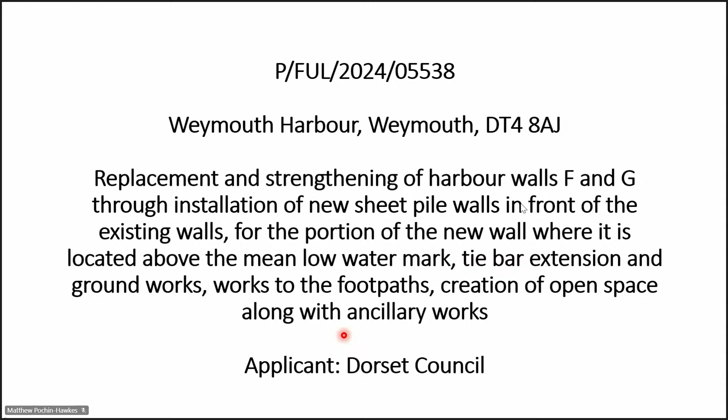It's for the replacement and strengthening of harbour walls F and G through a new sheet piling wall installed in front of those existing walls, all for the development above the mean low watermark, and with tie bar extensions, works of footpaths, open space, and ancillary works.

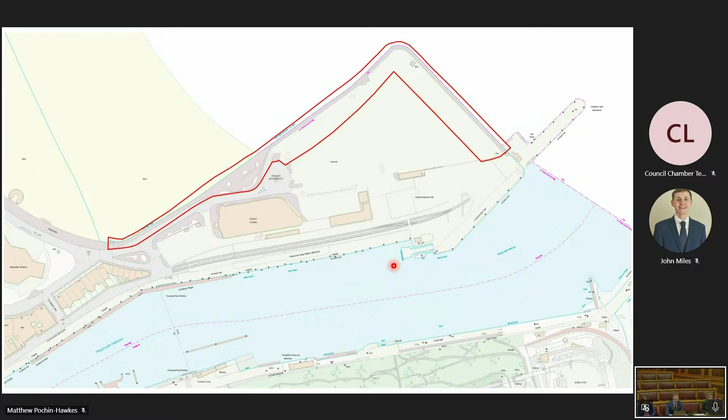So this is the site. It includes sections of the existing wall here, wall F and wall G, and the footpaths on the south side of that. It includes an open space here and the car park area, which is around the edge of the walls. This is an aerial view of the site.

The majority of the site is hard standing, save for some planters around this side of the existing open space, which is north of the Pavilion Theatre building.

The planning application relates to works above the mean low watermark, so that's essentially a small part of this section here, and then the existing land. Land below the mean low watermark falls within the jurisdiction of the Marine Management Organisation, for which there's a parallel application for marine licensing works that's currently live and undetermined.

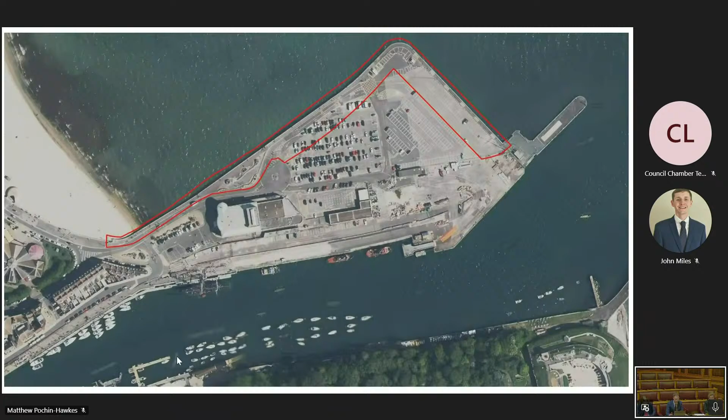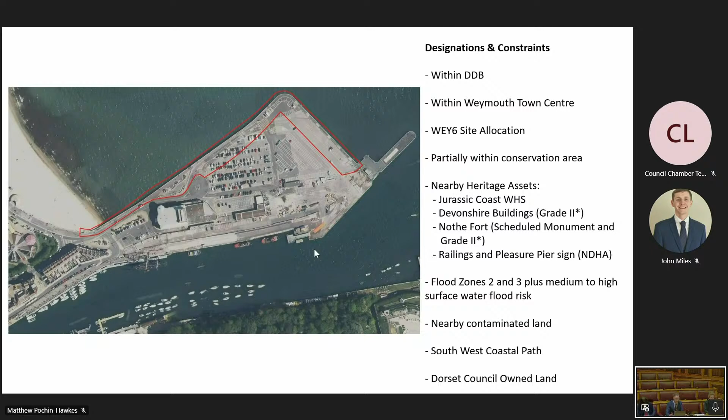So these are the designations and constraints. The site is within the defined development boundary of Weymouth. It's within the Weymouth Town Centre area, and it forms part of policy WEY6, which is a site allocation. That policy, Ferry Peninsula, is more to do with the long-term regeneration of this area. It includes the whole of the peninsula here, and it promotes the comprehensive redevelopment of the peninsula for leisure and tourist-related uses, supported by complementary town centre uses and housing, together with the continued operation of the ferry service.

Bear in mind, the local plan was adopted in 2015, and this ferry service has since ceased.

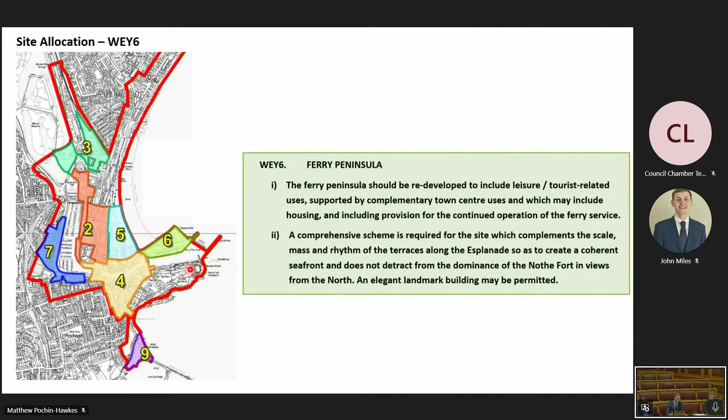Other constraints: a very small part of the site falls within the Weymouth Town Centre conservation area, just clipping the southwest corner of the site there.

Nearby heritage assets include the Jurassic Coast World Heritage Site, which is on the other side of the harbour entrance. The Devonshire buildings here, the closest asset to the site, are grade 2-star listed. There's Nothe Fort as well on the other side of the harbour, which is a scheduled ancient monument and a grade 2-star listed building. Within the site itself, there are the railings which run along this part of the

existing wall and along the west of the esplanade. They're a non-designated heritage asset, and there's also a pleasure pier sign, which is also considered a non-designated heritage asset.

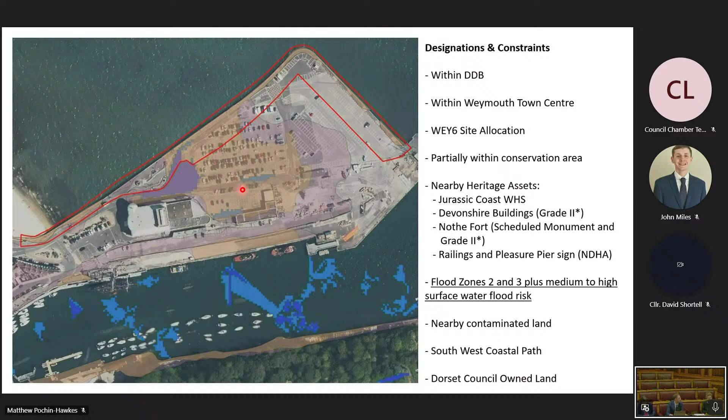So the site is affected by flood risk, as you'd expect. What's shown here is the flood zones 2 and 3, which affect part of the site and the immediate surrounding area of the peninsula, and they have medium and high levels of surface water flooding. There are also isolated parts of surface water flooding as well.

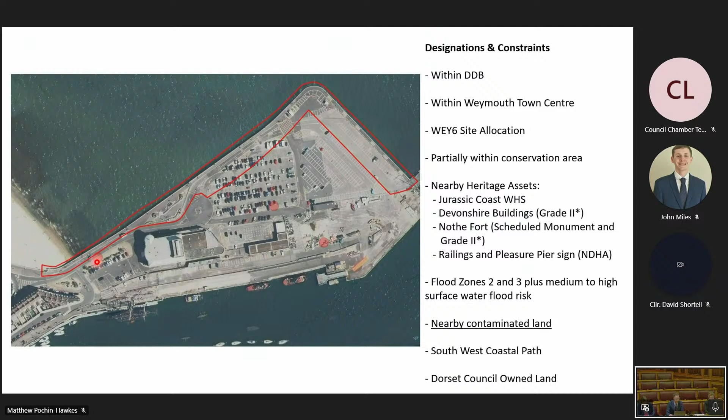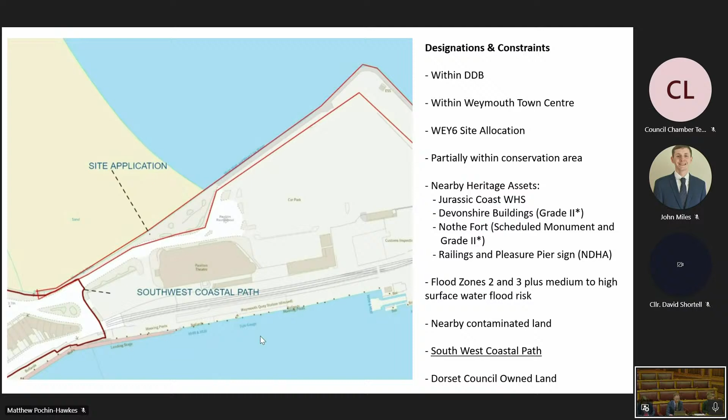There is a nearby spot of contaminated land, and there's also a few others across the wider peninsula there. The southwest coastal path clips the corner of the site as well. In terms of ownership, the site is entirely owned by Dorset Council.

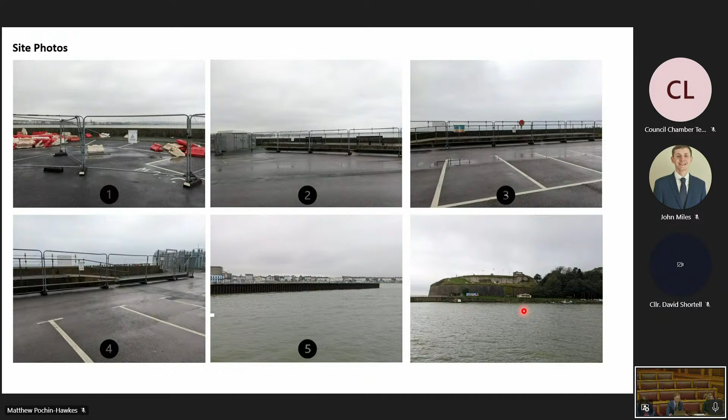These final photos here are from the pleasure pier looking back towards Wall F, and then looking across the harbour. You can appreciate the distance there with Nothe Fort and what is part of the World Heritage Site as well.

Just to provide some context, this is a historic aerial view showing the construction of Wall F and Wall G. It was constructed through piling and backfilling, with this section of land being reclaimed from the sea around 1977.

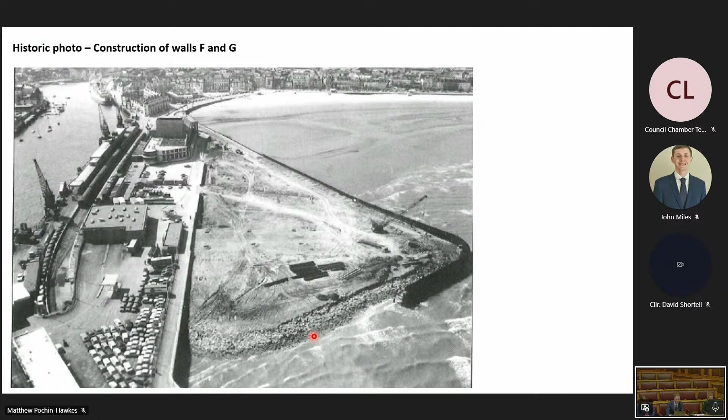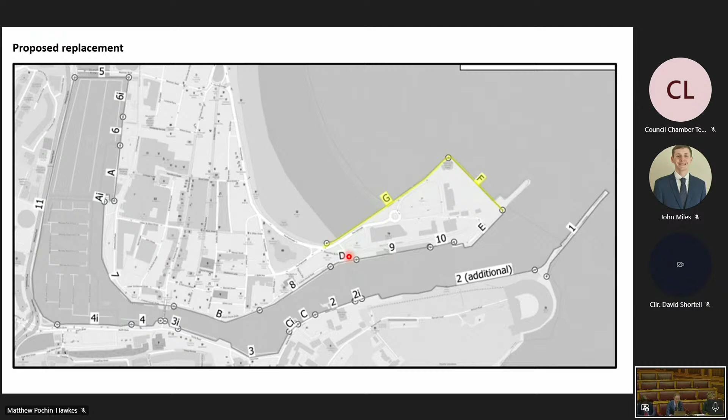The wall forms part of a series of flood defences around Weymouth, some of which have been recently upgraded, and others where there are future plans at different stages of development. So that's Wall F, that's Wall G, and the report also talks about some recent upgrades to Wall D down here, along Custom House Quay, where the wall has been fairly recently upgraded.

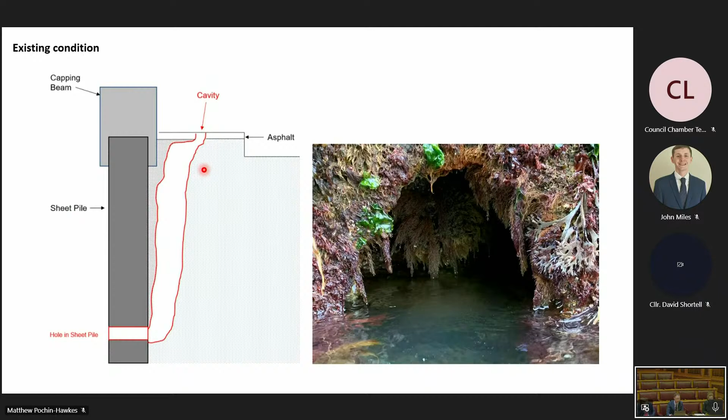Just to show the condition of the wall, they are in a very poor state here. This is one of the cavities that has opened up within the wall along that northern section. What you see here is a diagram from the applicant's engineer, WSP, which shows how that has led to sinkholes developing. The future lifespan of these walls is very limited - they are in urgent need of replacement.

So onto the proposed plans, the proposed development. There are a lot of technical drawings in this application, so I'm just going to focus on the landscaping plans and the sections. Here we've got the proposed landscaping plan.

The proposal is for the construction of new sheet piled walls in front of the existing walls. So all the work would be done on the seaward side of the development, and the existing walls would be demolished down to ground level, with part of the walls being buried below the ground.

It's split into two sections here. The first section is section G, which runs up to where the pleasure pier sign is. That section would be cantilevered without any kind of lateral supports underground. The remaining section of Wall G and Wall F would be supported by underground tie bars, which would link into the ground - that's an engineering operation which needs planning permission.

The new land created behind the new walls would be backfilled with new reclaimed land, and a footpath cycleway created along that front. So the footpath cycleway would get slightly wider.

There are two open spaces within the site. You've got the existing one here, which would be remodelled slightly, and I'll come on to that. And you've got a new open space here, proposed at the northern tip of the site, designed as a raised platform to allow better views over the raised height of the wall, and designed as a kind of picnic area with benches to compensate for the loss of seating areas along this section of the wall. The car park would also be rejigged slightly, with a slight loss of car parking spaces overall, but an increase in the number of accessible bays.

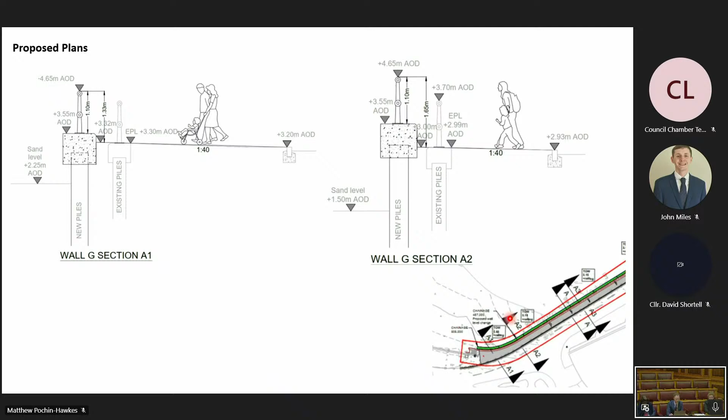As you progress round, so that section A1 on the left there, as you progress round, you can see it's similar to existing.

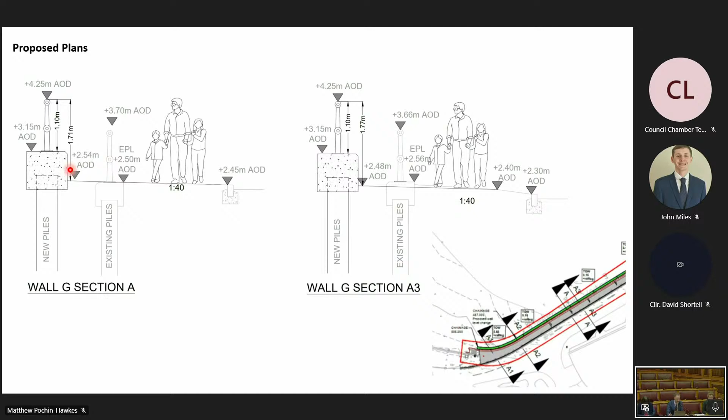Moving further along, the capping beam steps up slightly, but it's quite a low level. Views are going to be similar to what's there at the moment, and there'd be railings atop of that wall. Entering the existing public open space by the Pavilion Theatre, again, the design is similar, views would be similar across it.

What's changed within that space in terms of the landscaping is that rather than having a series of different planters within the site, there'd be one continuous planter along the eastern southern boundary. That's beneficial from a public amenity perspective, because it gives a barrier to the car park and creates more open amenity there. It's also important for compensating for the loss of those planters in biodiversity net gain terms.

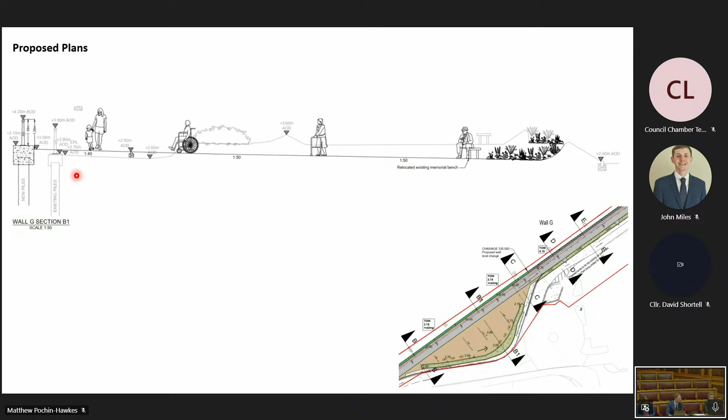This is a long section through that existing open space, and as you can see what I've talked about there, you've got relocated benches proposed, planting to the rear, and again, views would remain similar to what they are at the moment, and the anchor that's on that part of the site would be retained.

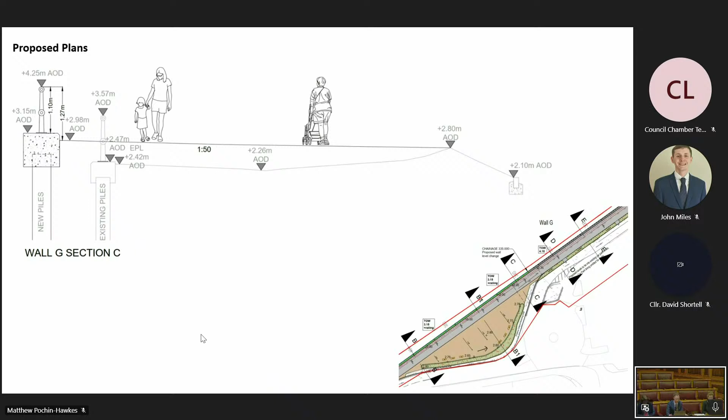Walking slightly further along, again, you can see the height of the walls would be similar to existing, and views would be similar. This is where the height of the wall changes quite significantly from what's there at the moment, and this is needed for flood risk reasons.

But after the existing open space, the wall changes from a cantilevered wall to one that's tied back in with these tie bars.

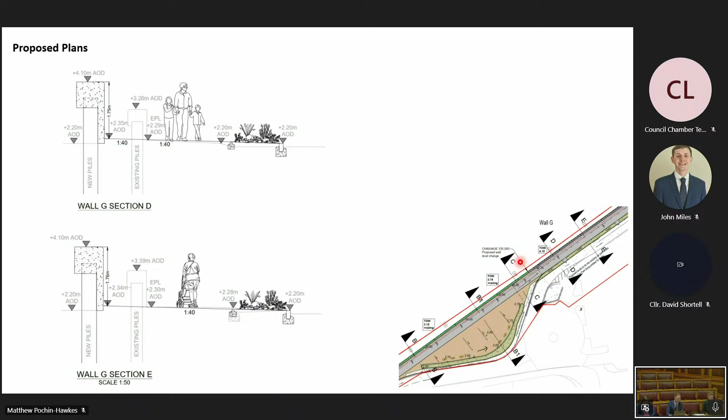In sections D and E, you can see the quite significant step up in the height of the wall. This goes up from around 1 metre at the moment to 1.75 metres. So it's going to restrict views along there.

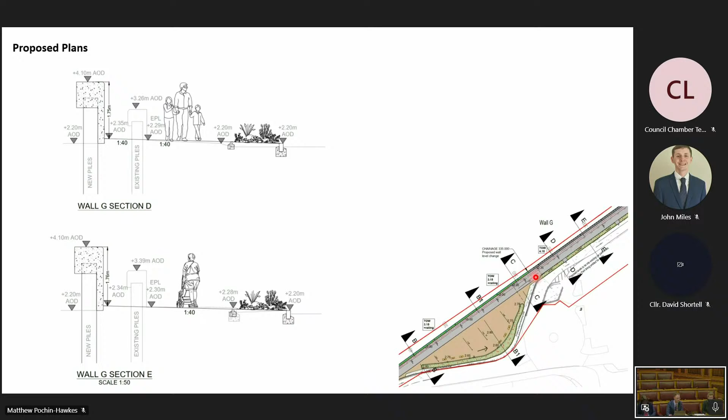But I suppose importantly, that's the section which people would just walk along. It's not a place that you'd dwell.

So that section of the wall is higher, and as you get towards the new open space, again, it is still quite high here. That is 1.3 metres there, so around 30 centimetres higher than what it is at the moment.

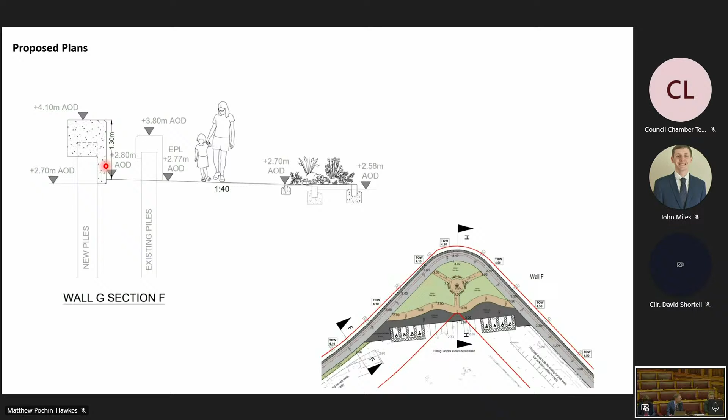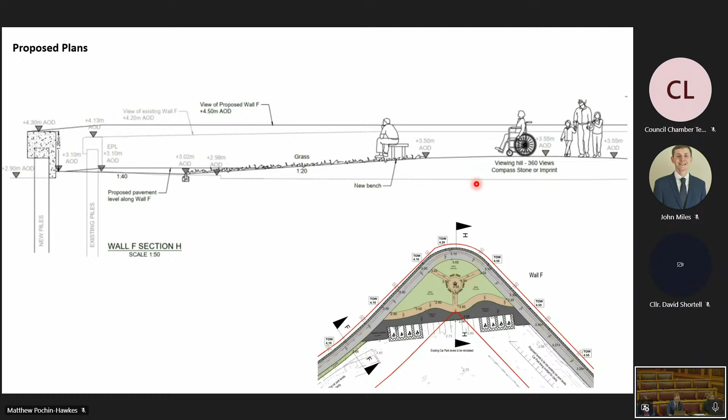And then as you get into that open space, you can see how it's been designed to have a raised platform here, so that members of the public can get those panoramic views across it, and there is public amenity in terms of seating to compensate for what was proposed to be removed in other parts of the site. And the wall here is around 1.2 metres.

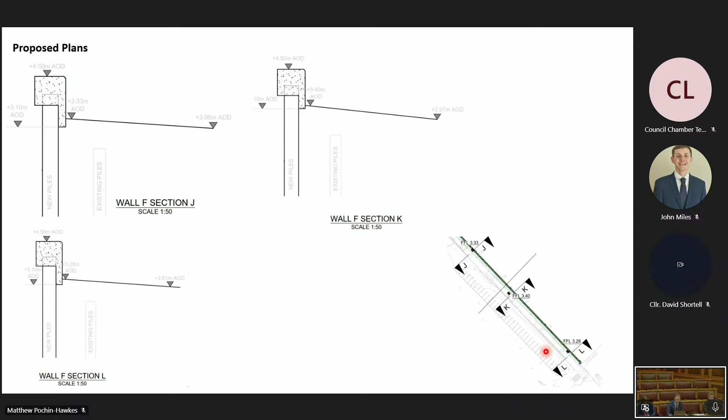The rest of wall F, as you walk towards the pleasure pier, the height of the wall is 1.2 metres, slightly higher than existing.

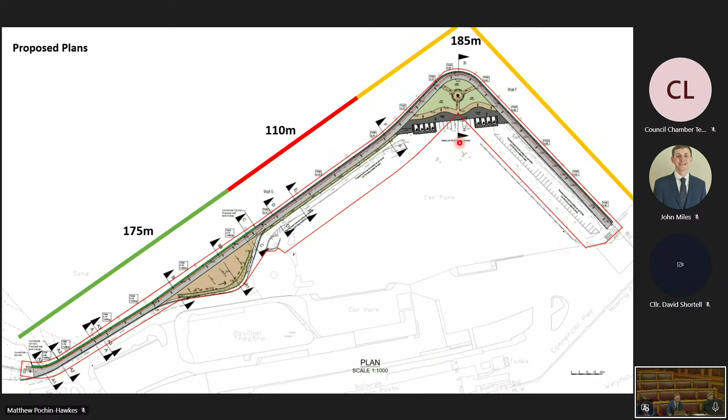And overall, it's about 75% of the length of the wall that would be visible over the top or have only limited restriction. So coming on to the key planning considerations: the principle of the development. The existing walls are in a poor state of repair, and they're in need of urgent replacement, as you've seen from the photos and the applicant's reports. So the replacement is wholly acceptable in principle, and the improved open space and pedestrian cycle routes are also acceptable in principle.

In terms of design, landscape, and local character, the design has been amended over the course of determination in response to officers' comments and concerns. Those changes have improved the design. At the end of the day, it is what it is — it's a seawall, it's functional, it's fairly utilitarian in that design. But the open spaces are an improvement, and overall the design is considered to be compatible, and the landscaping is acceptable, subject to conditions.

And just to point out on trees, you see in the report that the landscape officer does say that there's potential here for tree planting within the site. The site hasn't got any trees at the moment, apart from the planters, it's all hard surfacing. In the absence of a policy for net gain of trees within the site, I think the officer's view is that it's acceptable without new tree planting in the site.

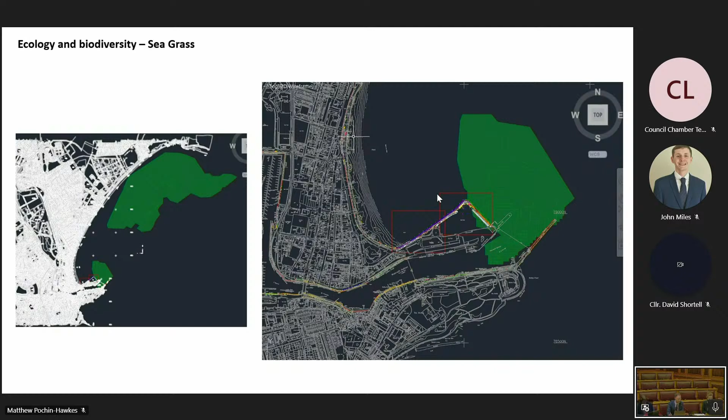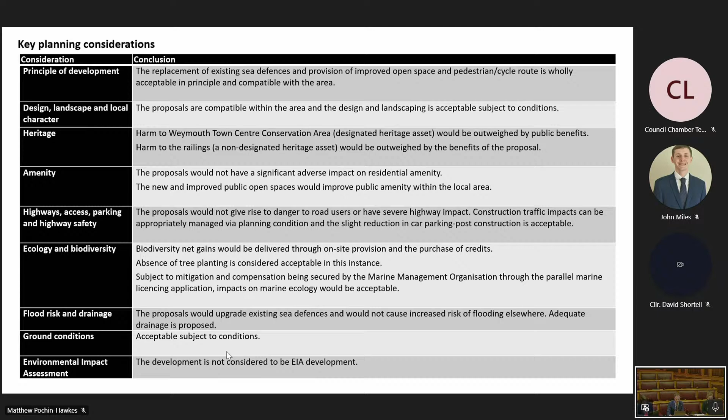So the recommendation is to grant planning permission, and that's, as I've said, subject to confirmation from the MMO that the parallel marine licensing application secures appropriate mitigation and compensation, and we should receive written confirmation from the MMO if and when that is the case.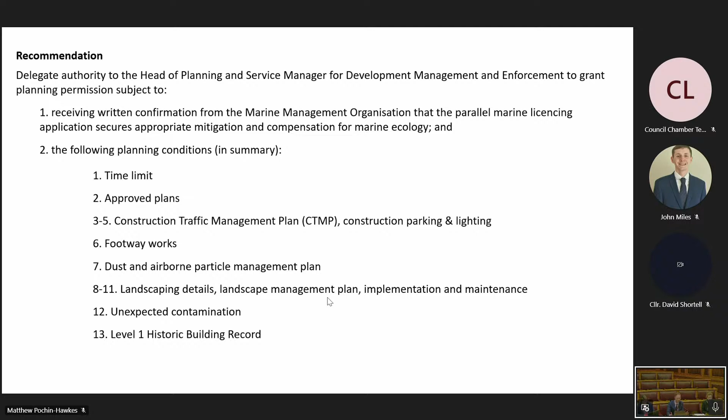The planning conditions proposed relate to the time limit and approved plans. There's construction-related conditions on the construction traffic management plan requested by Highways, construction parking and lighting, and footway works to be designed and aligned with Highways requirements. There's a dust and airborne particles management plan to manage construction effects on the beach, so it's not kicking up dust and particulate matter that could be an amenity concern. There are landscape conditions on details, landscape management plan implementation and maintenance, and retention of the pleasure pier sign. There's also an unexpected contamination condition, and a requirement for a level 1 historic building record - a basic photographic record of the pleasure pier sign and railings before they're removed, to ensure there's a record of that.

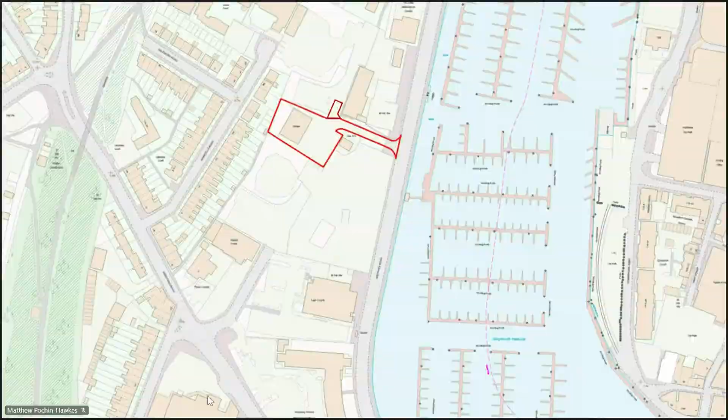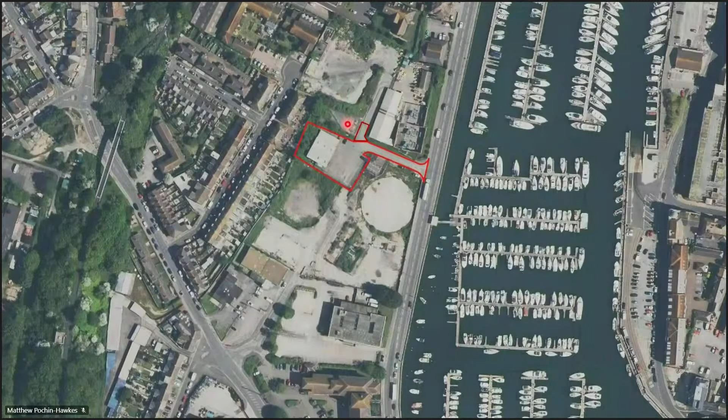This is an aerial view showing the surrounding area. To the east is Westwey Road and Weymouth Harbour. To the south lies the former gasworks site, of which the gas holders, for which the site formed a part. To the west is Granville Road, where you've got 2-storey terraced housing. To the north is a vacant parcel of land which had planning permission for redevelopment of about 23 homes, but that expired towards the end of last year. To the northeast is a site owned by SGN.

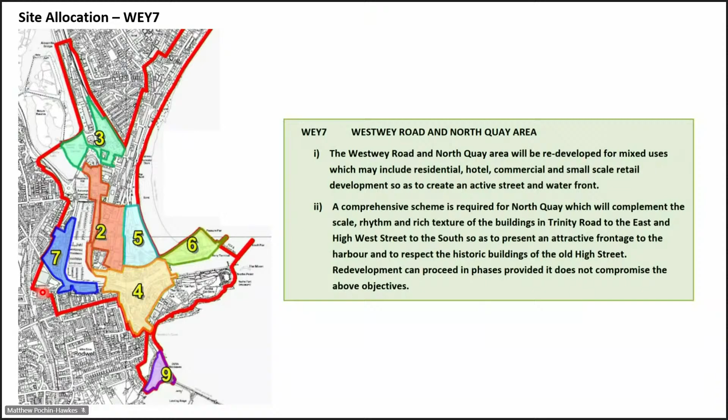So the designations and constraints: it's within the defined development boundary, within the town centre of Weymouth. It is allocated under Policy WEY7 of the local plan. Policy WEY7 is here in blue. It includes much of the land on the west side of Westwey Road and North Quay, and it promotes mixed-use development of that area for a range of uses, including residential, hotel, commercial, small-scale retail, and an active street and waterfront as well.

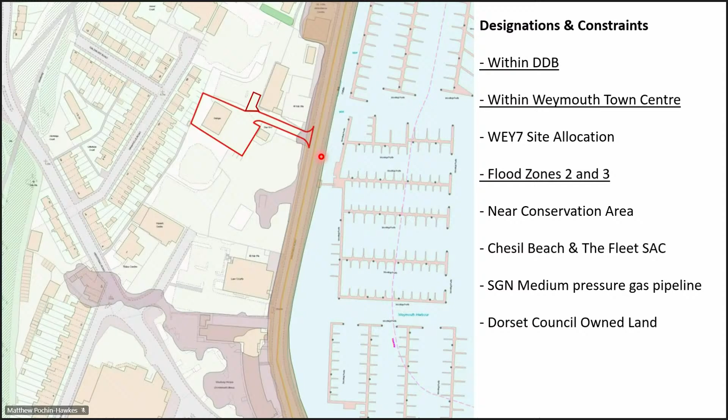Other constraints: the site falls within flood zone 1 for the majority, but the access falls within flood zones 2 and 3, and that's affected by tidal flooding. You can see flood zone 2 here in purple, and the yellow colour is flood zone 3, which includes the end of that access where it joins Westwey Road.

The site is near to the Weymouth Town Centre Conservation Area, which extends to include Weymouth Harbour, and the site is within 5 kilometres of Chesil Beach & The Fleet SAC. This just shows the medium pressure gas pipelines under the site, as you'd expect with the nearby gas holders site, and there's a current gas substation here as well.

And in terms of land ownership, the access is all within Dorset Council's ownership, as is land to the north and land to the south.

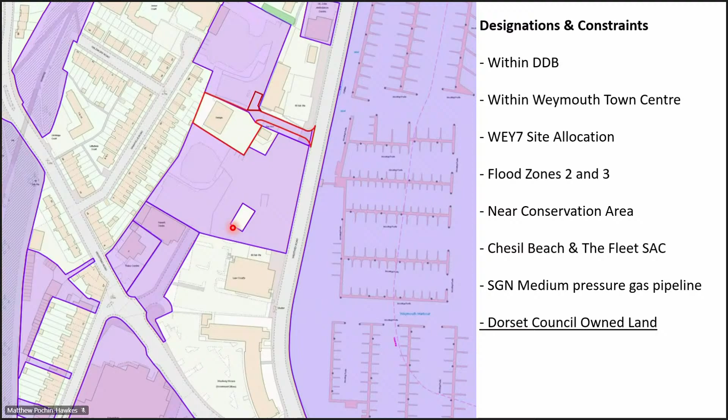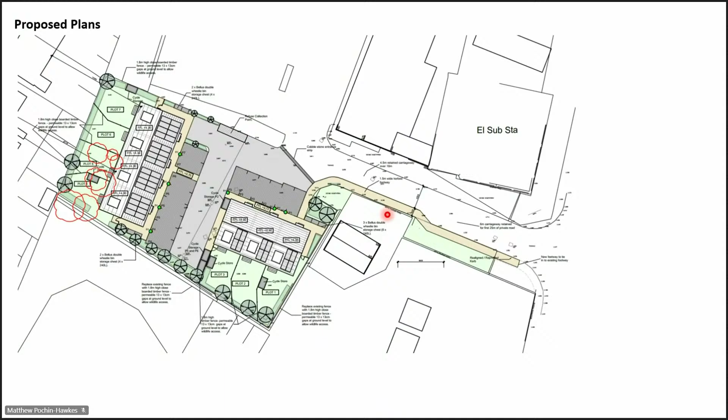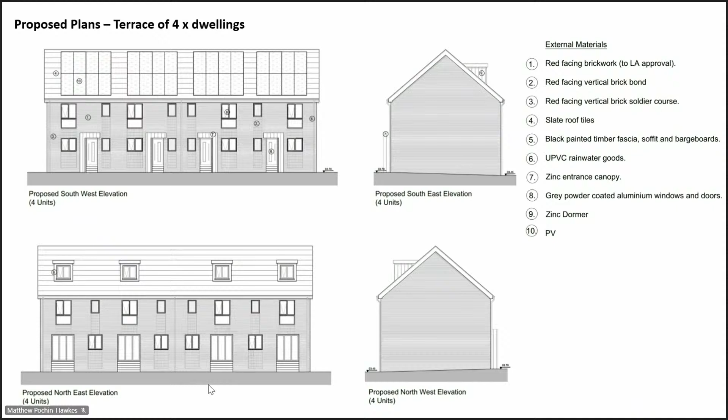The four unit terrace of three beds is the same design, so there's a consistency there across the development, and the floor plans are consistent as well.

On highways, just to talk to a couple of things before I go through the main planning considerations, in an effort to try and overcome the concerns raised by highways, there's been an iterative process of amendments that have come through and addressed in the report.

But one of the concerns from highways is that two vehicles can't pass each other, two large vehicles can't pass each other in this narrowed width of 4.5 metres.

To try and address that, what the applicants proposed is to introduce some white lining within the road, essentially a give-way marker here and some signage, so that anyone entering the site and approaching this way would need to give way to oncoming traffic. I think there's space here for about 16 metres to the entrance, which would allow for about 3 cars to queue if necessary.

In terms of off-site improvements, highways have picked up on a concern that there isn't a safe way to cross this road apart from walking down to Asda and going across that junction. And there's a southbound bus stop on Westwey Road, which residents may feel the need to dart across the road at a kind of unsafe point.

So the applicant has proposed that they would introduce a new safe pedestrian and cycle crossing. On the right here, that's just the illustrative design for it, and that would need to be secured by a Grampian condition.

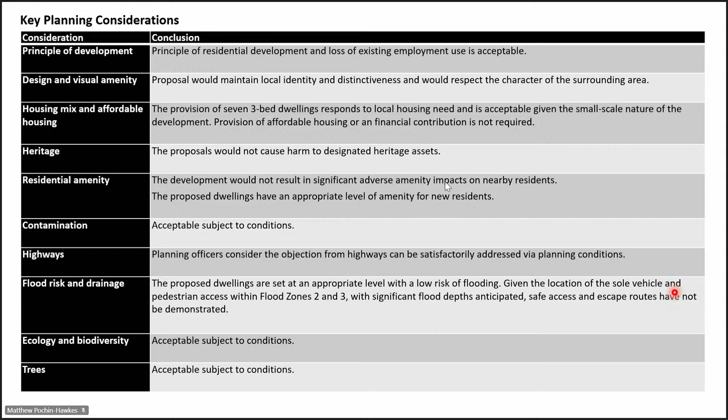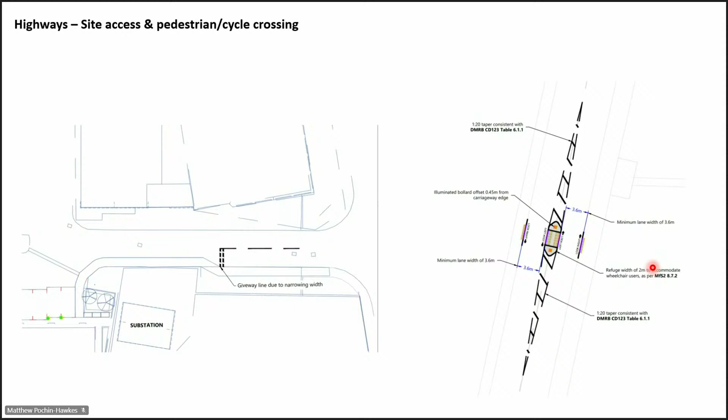The northwestern site is allocated for redevelopment. The previous proposals had vehicle connections through to surrounding roads, so it may well be that future connections go in through there. The introduction of the proposed crossing here would address the concerns on pedestrian safety on Westwey Road.

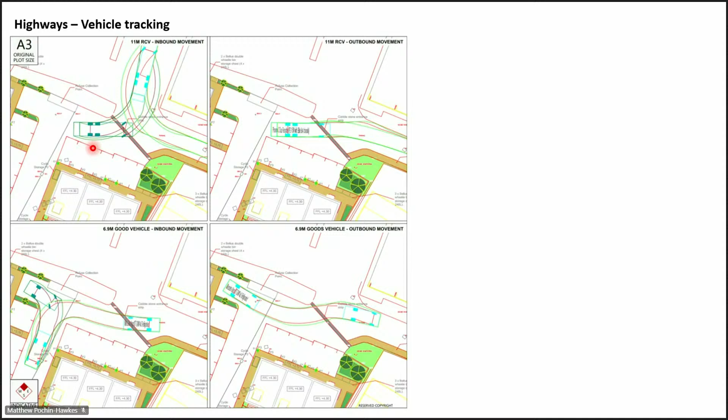In terms of refuse service vehicles, the proposed bin store is located near the entrance to the site, within 10 metres of the access and within the recommended drag distances for refuse collection. A refuse collection vehicle could service the site from here and then turn further along the access road, or it could reverse into the site, which is not ideal but not considered unacceptable in planning terms. Overall, the planning officer's judgment is that highway concerns have been satisfactorily addressed.

Flood risk and drainage is the key issue on this application. The homes are in flood zone 1, at a safe level above the predicted design flood level, but the access falls within flood zones 2 and 3. In planning terms, housing must be safe for its lifetime, being 100 years, and a residual flood risk must be considered. Because this site is affected by tidal flooding, the design flood risk event is a 1 in 200 year event, and that's what must be planned for.

The applicant has submitted a flood risk assessment, and they've also submitted flood warning and evacuation plans, which I'll come on to. The FRA doesn't model the depths along Westwey Road. I think we're all in agreement that the depths would be quite significant, and it doesn't make reference to the council's strategic flood risk assessment for Weymouth, which was introduced in February last year.

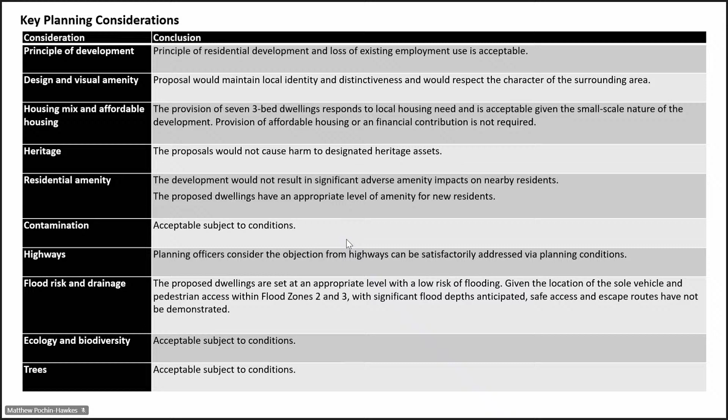So I'm going to go through some of the plans from the strategic flood risk assessment now, and just to show the kind of 1 in 200 year risk.

The EA have responded to this application, the consultation. I think they say the depths would be around 1.6 metres on Westwey Road in a design flood event, overtopping the existing flood defences, and that lines up with what the council's strategic flood risk assessment says.

The strategic flood risk assessment goes into some detail on all the allocated sites within the town centre, and what it says is that you need to address user safety throughout the lifetime of the development, and it acknowledges that safe access and egress will be important for this site and the wider allocation.

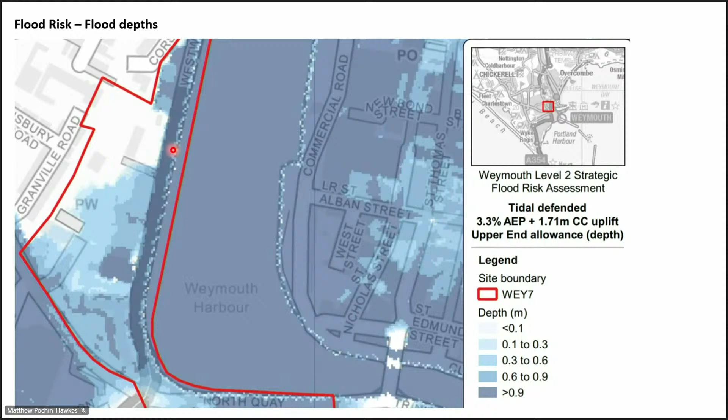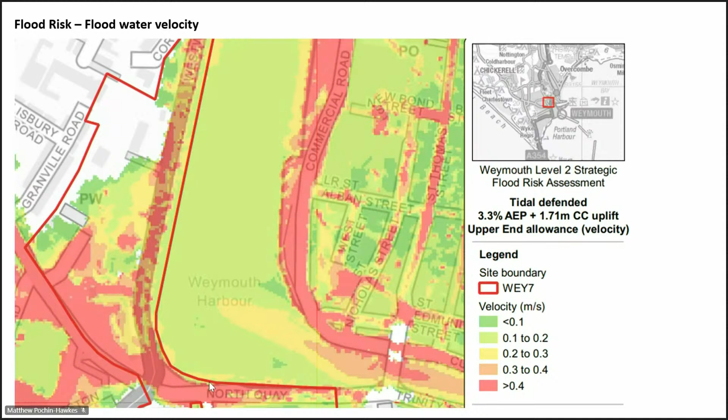The velocities would be 0.3 to 0.4 metres a second along Westwey Road, so relatively high, and the hazard rating would be significant.

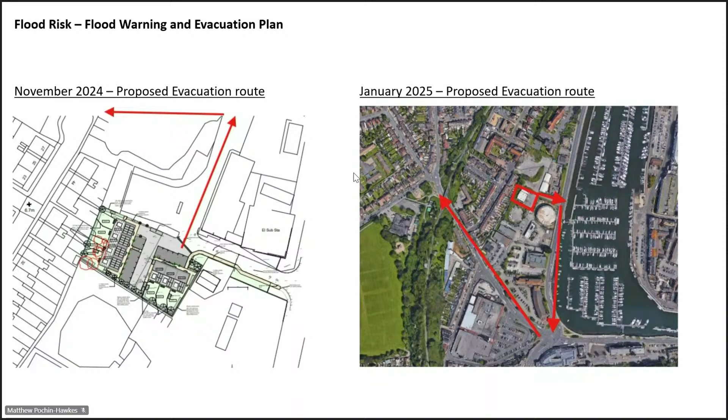Following review of the flood risk assessment and consultation with the Environment Agency, officers did request a flood warning and evacuation plan. That's considered essential given the flood risk to the site and there only being one access into it. So what we have on the left-hand side here is the original flood warning and evacuation plan.

What that proposed is an evacuation route going north through the adjacent vacant site and linking through to Granville Road. That site doesn't have planning permission. We're not quite sure how it's going to be built out, so we can't rely on that access route as providing access through. So what the applicant has done earlier this month, they prepared an updated flood warning and evacuation plan.

That proposed a route along Westwey Road down to the Asda and then up to higher ground here. And evacuation would work if residents evacuated before a flood occurred, and the site is within an EA flood warning zone, so they could sign up to EA flood warnings, receive flood warnings and flood alerts, and if they evacuated immediately, they would be able to do that without being at risk of flooding.

The EA aims to issue flood alerts within 2 to 12 hours before a flood occurs, and flood warnings, when a flood is imminent, are aimed to be issued between 30 minutes and 2 hours before a flood occurs. The issue is we can't place full reliance on those flood warnings because they could well occur at night and residents may not be able to evacuate.

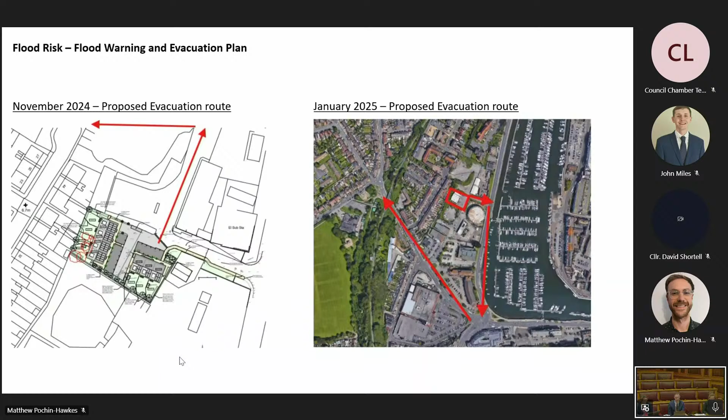Ecology, biodiversity and trees, matters will be acceptable subject to conditions. There'll be a net gain of trees overall. The existing trees are in poor condition.

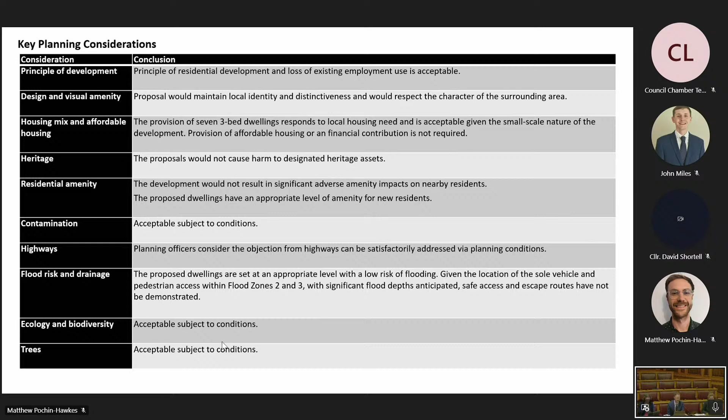Overall, the development is acceptable in a number of respects, and it clearly makes a contribution of regenerating a brownfield site and introducing more family housing. But because of the flood risk issue, it's not considered to be acceptable, and the other benefits aren't considered to outweigh it. So accordingly, the recommendation is to refuse for the reasons around safe access and escape routes.

The recommendation is subject to not issuing a decision before the 29th of January. The reason for that is because the red line was amended over the course of early January, and owners need a 21-day notice to make any comments. So if there weren't any comments received within that 21-day period, then we could issue a decision either way, approve or refuse. You see there in bold, that's in the update sheet.

There's a couple of updates on this one, but the applicant did submit another version of the flood warning and evacuation plan. That was on the previous slides as well, but it's dated 20th of January, so just updated that date for clarity.

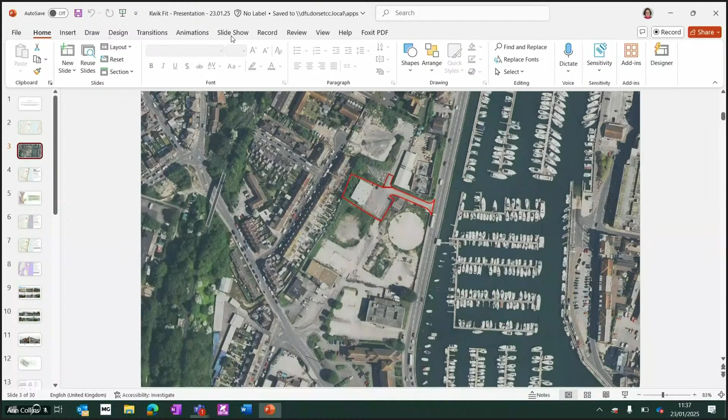I think in the report we talk about there being a greater opportunity to do a larger, more comprehensive development, but we have to assess this application on its basis and what's proposed, and it does align with the allocation and the master plan.

In terms of the master plan, it talks about a mix in this zone, particularly mixed use with ground floor commercial uses. Obviously we haven't got ground floor commercial uses here, but it's set back from the road, so the approach is acceptable there. Have you got it? Yeah, that's Ann's just got the plan on screen now.

Thank you, Matthew. Councillor Kimber, I understand where you're coming from on this one, but unfortunately we are constrained by the fact that we have to look at this in isolation. It would be lovely if there was one big scheme encompassing the whole site, but there isn't, I'm afraid.

Councillor Bown, did you have your hand up for technical questions? Thank you, Chair. Louise Bown, Radipole Ward. This probably reflects the fact that I'm relatively new on planning. I was just going to ask, what happens to the road of the site? Does it get adopted by Dorset Council, and who maintains the proposed crossing island in the middle of Westwey Road?

Matthew, or we do have Highways with us for any technical questions, so perhaps pass over to Susan. Thank you for your question. Yes, Susan Hetherington from the Highway Authority. No, the estate road hasn't been offered for adoption.

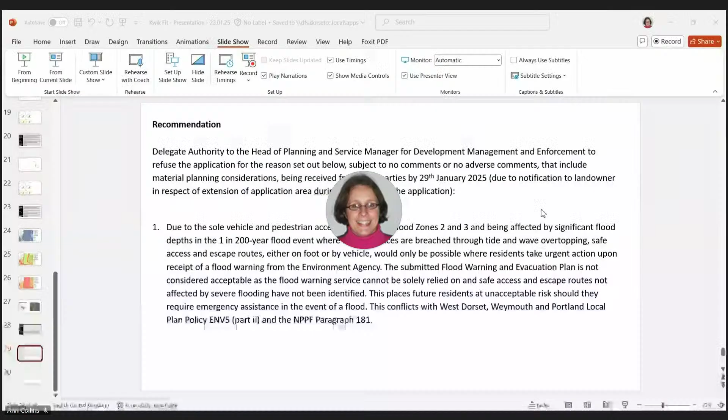Yeah, I think everybody has seen the update sheet, so I don't think there's an issue there. Before we go any further with the proposal, there are some members who haven't spoken to this one, so could I please ask, if you want to speak, please speak to the proposal now. Thank you.

So I understand then that all members must be happy they have sufficient information to enable them to make an informed decision on this application. Am I correct? Seems to be assent around the chamber.

To recap, we have a proposal from Councillor Weller, seconded by Councillor Shortell. All members have had the opportunity to speak on the proposal, so can I have a show of hands, all those in favour? That is unanimous to accept the officer's recommendation to refuse this application.

Could you just clarify the wording on this one, Matthew? Thank you. Yep, so it's delegate authority to the head of planning and service manager for development management and enforcement to refuse the application for the reasons set out below. This is subject to no comments or adverse comments, including material planning considerations, being received from third parties by the 29th of January 2025. That's due to the notification of the landowner, Dorset Council, because of the extension of the application area during the course of the application. I won't read out the whole reason there.